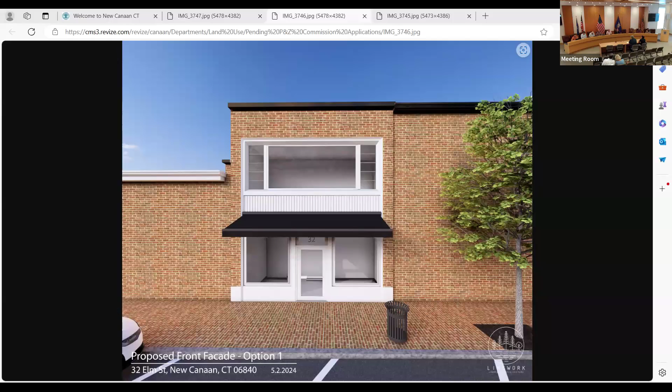Okay, now you're good. We're here tonight to propose a very simple modification to the existing first floor level storefront at 32 Elm Street. And that modification involves reinstalling existing elements of the storefront by moving, on the Elm Street side, the door will come forward 20 inches and the glass would then align with the facade above. And as you can see on the jamb next to the brick, that's as far as we would come forward. That's our, if you can imagine the glass just doing this. So we're bringing the whole thing forward.

Same thing in the back. We have a pocket with splayed glass going back. We just want to bring that door forward, the door, the frame, the jamb for the window forward, and align it with the existing glass. And that will align with the facade above. The walls will remain the same height as they are now, which is 21 inches, both front and back. The clear opening on the front is 41 inches, and we would maintain the ADA sill.

Once that's built, we would propose to cover the old metal parts with a material called AZEK. It would be white and look like wood.

We then had a glass contractor come down and talk to us on site to take a look at our ideas. He said it's very simple for him to do, he does it all the time. So that was encouraging.

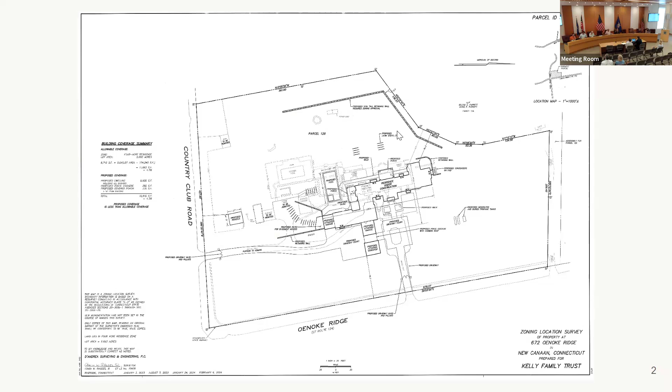You'll see that there's a stone wall opening here, a retaining wall for the walkout. And then in the rear, this is the longer wall that sits along about 12 feet to 39 feet from the westerly property line. This is just a picture from the front.

This is a house that's under construction right now. It's about a 5.6 acre piece of property, once again on the corner. This is the front of the property that faces Oenoke. This is the corner of the property.

Essentially, as you look down Country Club Road, you can see it starts to drop off even from the top here. This is the second entrance that comes off Country Club Road into the property itself. And this is looking back up the street from Country Club Road towards Oenoke.

You can see here the grade change as it comes down, and that's important because that's really essentially why we're here today, to put in these retaining walls to try and do two things. Number one, we're trying to create a recreational backyard for the Kellys, because right now it sort of just falls down off the back of the property. The second thing we're trying to do is alleviate the drainage that's coming down the hill from this property to other properties on Country Club Road.

This is that back drop off that I wanted to show you as part of the initial part of it. You can see it's a pretty steep drop. It's about 17 feet from the back of the property to where we're actually proposing to put the retaining wall to the west. This is just kind of a larger view of it.

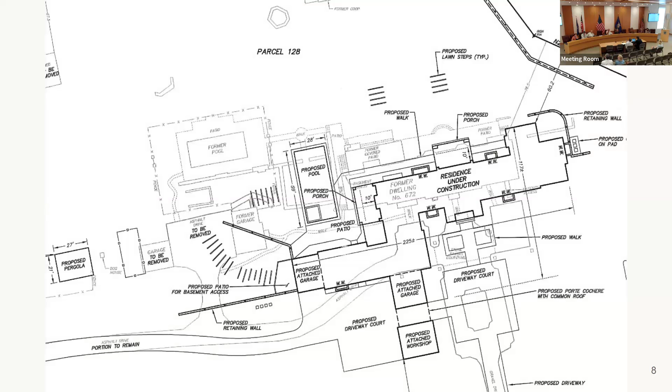This is our plan, which we'll go through in a little bit more detail. You'll see the first item we're asking for is this walkout area, which is where the garage comes in, the basement walkout comes in. And then the rear wall here, which is what we're proposing to bring back up and create this recreational space in the back of the property.

I'm going to come back to the site plan when Len's ready, so I'm just going to skip through these. So here's that walkout area that we were talking about earlier. The walls are going to be in on this area and they are above 4 feet.

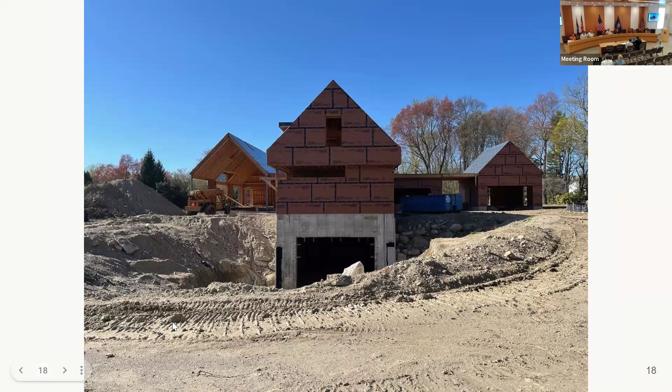This is looking back up towards Oenoke Ridge from that particular spot of where the walkout's going to be. And this is just a larger dimension of how the walkout's going to work and the way it's been regraded on the sides and the way the walls are going to come.

The retaining walls are going to hold back this dirt. The west retaining wall, and like I said, I'll go back through with the site plan and with the development team so that they can explain exactly how they came up with this.

But I just thought it would be a good idea to get us all familiarized with the site before we get to that.

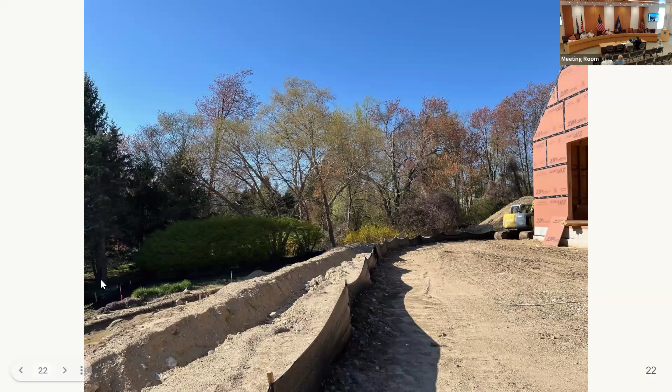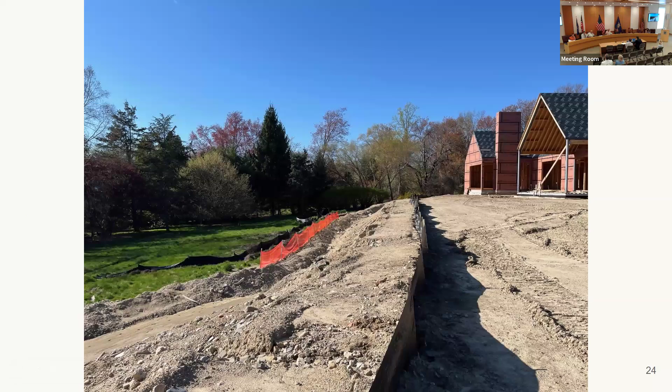So here's the west retaining wall. This is the back of the property right now, looking north. Here's the screening to the north side of the property, and you can see the drop off. I've got a couple different pictures of the drop off. Fortunately, we have a lot of screening right now on the property, which is not coming down. This is once again looking northwest, and this is once again the rear, looking down. You've seen this picture once before.

And then we're back to this plan here, which I'm going to skip through. And this is the wall itself, which I'm going to ask Alan Broadbent to go through as far as the wall that we're proposing to build on this.

I think what I'll do now is just have Alan go through this. Here's some pictures of the screening that exists on the property from the landscape perspective, and this is looking back towards Country Club Road.

So the wall is going to start in this particular area back here. You'll see that we have some nice screening on both the south side of the property, looking south. I think I'll let Alan take it from this slide, because this is the development of the property and how he went about thinking about creating this space in the back and bringing in the retaining wall itself. So Alan, I'll turn it over to you.

Thank you, Dave, appreciate that. Alan Broadbent, landscape architect with Broadbent Design Studio. Wonderful to be here tonight.

As Dave mentioned, our office was engaged by the client, Chris and Laura, to come up with a way to compose this site to fit a new residence onto it, and to maximize the site's potential and make it a beautiful and wonderful place for them to raise a family.

As we began our process, we looked at the existing conditions on the site, and we noted immediately that there's a beautiful stand of maple and oak trees in the southeast corner, where Country Club and Oenoke meet, and that area would remain as a glade area with lawn beneath it.

It's easy to quickly jump to the default wall system, which is a concrete reinforced retaining wall. Whether or not it's stuccoed or clad with stone, this type of wall is a known entity and is used in many different places. It does, however, require an extreme amount of excavation, hundreds of yards of concrete, and thousands of pounds of steel.

So we started looking at this thinking, is this really the right solution to build this kind of wall, knowing that already 80% of the proposed wall would be obscured by existing screening trees, and that we could achieve 100% screening if we added a few more trees and shrubs? So what other wall systems are out there that would be more efficient, more value conscious, and have a lighter hand on the earth?

We looked at retaining wall systems built of segmented concrete block, systems that use geogrid mat reinforcing to hold back the earth and that have greater drainage benefits to the project. So we arrived at the wall proposed to you today, which is a Unilock segmented concrete retaining wall that allows this wall to be built without the volume and mass that a concrete retaining wall requires, and with the drainage benefits this wall delivers.

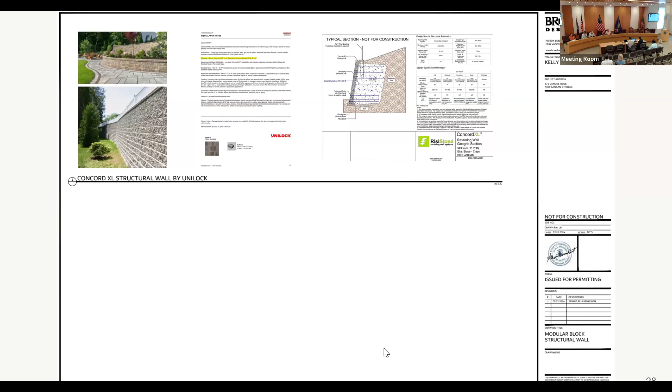Good evening. My name is Leonard D'Andrea, Connecticut professional engineer. Our firm, D'Andrea Surveying & Engineering, P.C., provided land surveying and site engineering services. To my left is Adam Serini - he was the brains of the design, he did all the analysis, and we came up with the design presented in this slide.

If you could back up to slide 9, I'd like to start with the existing conditions. There were a couple of letters submitted from Attorney Green about an original design back in 2008 implemented to help solve drainage problems for the downgradient neighbors. We recognized that and documented it, surveying it into our existing conditions plan, so we're fully aware of what that initial plan was. Now you can proceed to the site design plan.

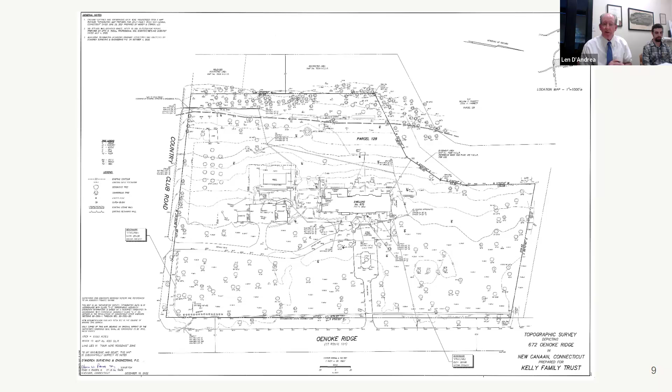This plan shows the latest design, which includes the retaining walls and the walkout basement. But behind this is our drainage system, designed to accommodate the larger footprint of the home and to better keep with the design requirements of the town of New Canaan. In that southwest corner, when we walked it, we recognized there was some sort of capturing system, which turned out to be a curtain drain.

That's the thin line where the cursor is pointing. We also noticed it had not been well maintained, so we knew we had to address that in our design going forward. The new design includes a significantly sized infiltration array, more or less in the middle of the site - that large rectangle - which does two things.

It provides first flush control and infiltration for water quality, so it's a retention system. In addition, it's a detention system, and whatever exceeds that capacity gets released in a controlled fashion so that we have decreases in the peak rate of discharge.

We also added a rain garden in the southwest corner, something that wasn't there before, to get more volume control and more water quality. And of course, we're rebuilding the curtain drain. One more thing of interest here is it is a bigger footprint, and it also has a deeper foundation.

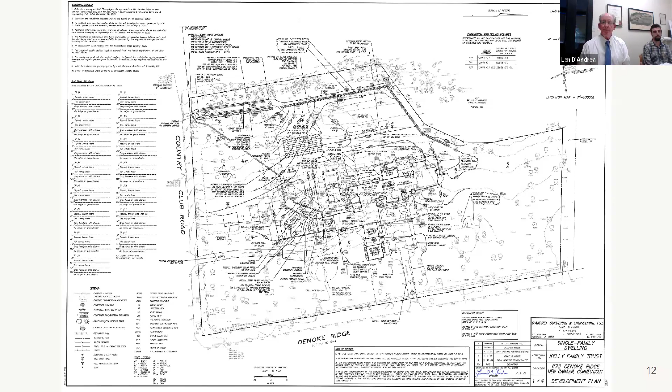Would you like to ask any questions now, or do you want me to finish? Why don't you go ahead and finish, and then we'll ask all the questions. Okay.

So as far as the special permit criteria that we look at, we believe that with this lot, it's a larger lot in the zone. Obviously it's a 4-acre zone. We have over 5.6 acres on the property. So this particular development, these particular retaining walls are not going to be anything different than what could be on these properties today.

We believe that they're appropriate for what we're trying to accomplish, and they also really serve as an additional slowing down of this water, and is going to really help not only this particular piece of property but everybody down on Country Club Road from that.

The first plans, a couple of plans that we had that Alan talked about a little bit, we have a lot of screening on this property to begin with, but they've added almost another 25 trees and shrubs to the property. I mean, the whole design of this wall was that we wanted no one to see it.

So to a certain extent, it wasn't how the wall was going to look, it was how no one was going to be able to see the wall. That's what the proposal was, that's what the landscape design team wanted to do. We don't want anyone to see the wall either, from any of our neighbors' properties, and we think that we've achieved that to this point with this new plan.

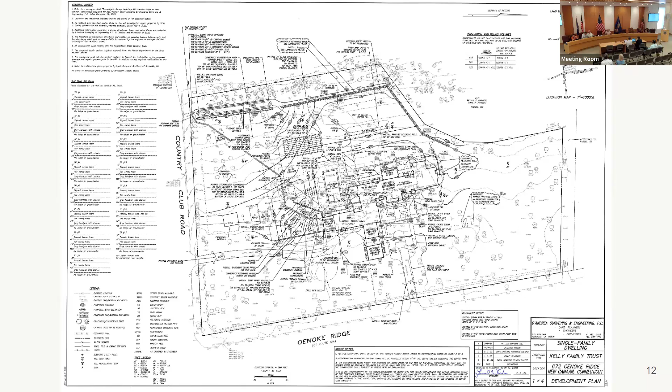Well, I'll address it regardless. Attorney Green was concerned and his neighbor was concerned. Now they're a property away, so they're not technically within 100 feet of this application. So they don't have standing in the application, but orient us, because the survey only identifies Perrette. He's below Perrette, further west. How far does Perrette go? Is there somebody else adjacent to Perrette? And who does Attorney Green represent? The Russells. And are they adjacent?

No. So if you look on this plan here, this is slide 37. You'll see the Perrette house is what I'm pointing to here, and this is the Russell's house down here. And who is to the north? That's Ovenoak. We have not heard from them.

But nonetheless, the design is to help everybody on the street. So we don't have an issue with Attorney Green and the Russells coming to inquire about this to make sure that everything is being done properly. It's not something we're concerned about, because in the end, what we're trying to do is alleviate this water situation. So we have responded to that.

We have not heard back from McCord yet. But as I said, we're very pleased with the plan. We think it's been really well thought out. It's got a tremendous amount of existing screening. We're adding a bunch more screening, which will continue to hide this wall. And we think that in the end, this is a great asset to the neighborhood, not only for drainage, but this wall being screened will create an area for the applicants to enjoy instead of having a steep drop off on the back of their property.

So I'm happy to answer any more questions today. I don't know if you want to hear from anyone else first, or if you want to ask any questions of the engineer. I think we do have some questions. Mr. Benton, Commissioner Benton here.

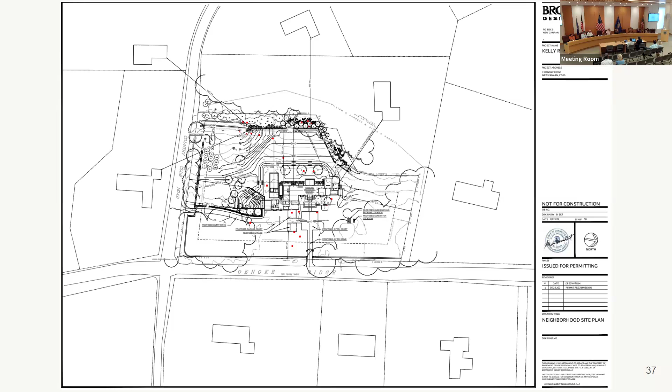I'd like to, if I may, comment on the block wall construction, would that be appropriate?

The modular block wall, one good characteristic about it, is it doesn't require a deep foundation. It's very shallow, and the way it stabilizes as you come up, you have fabric that goes back and you fill on top of it, and that resists the overturning. So as you build it up, you create a barrier, and it goes up daily.

So as far as ease of construction and the least amount of disturbance, this is a very good wall selection, not to mention the fact that it's 8 to 9, 10 feet high. It's just built essentially from the ground up, and as you continue up, you have a wall that continues to block any runoff. It's not nearly as disruptive as a big concrete wall, which takes much longer. You dig it first, pour your footing, come back, put your forms up, put your steel, all these things. It's a much longer duration of exposure. So that's why we like it in this application.

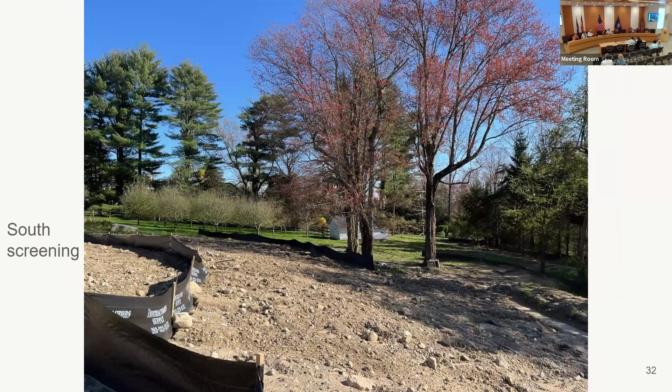I wanted to address the question about the 4-foot wall plus an 8-foot horizontal separation plus a 4-foot wall. One of the challenges of this property, not immediately obvious, and it wasn't to us because we actually started with the 4-foot wall, separation, 4-foot wall design, is that the property has a cut out of it.

It isn't a wholly square shape. There's a big sliver out of the side of it. The reason that exists is that when this was subdivided—it was many acres—it was split into 2 properties in order to make the property that is now Mr. Perret's property a buildable lot. A minimum diameter 350-foot circle had to be placed on that lot, and you can overlay a 350-foot diameter circle, and it's the exact shape of the property line. That's literally how the surveyor did it.

So that big cut out of the property means that on the northern property line, we have a much tighter space to work with. If our goal is to maximize usable land, which is what we're trying to accomplish in that area, it becomes really tough when you rob another 8 feet. It sounds silly, like 8 feet, really? It's 5.5 acres. Consider the position of the house, which we already moved 12 feet closer to Oenoke Ridge than the old house to get away from that angled property line as much as we could, and consider that 3 acres of the property won't be touched. The entire southern side, southeastern side, and northeastern side are remaining exactly as is.

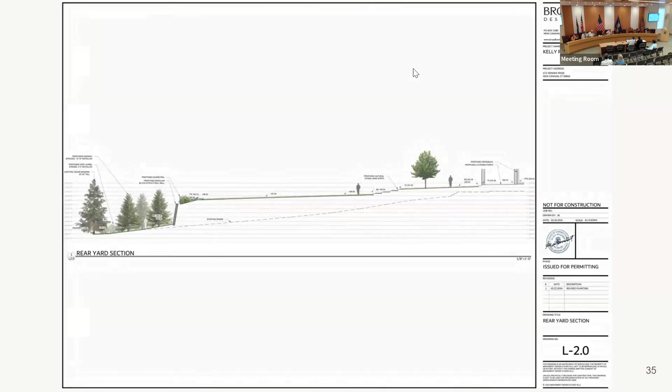That's a very interesting section of land. There is, on the Parrett property, an easement in favor of the owners of 672 Oenoke that was written up long before our clients took ownership, allowing them to mow and maintain that space. So in effect, we're still 40 feet from the edge of the eased space, but we're 12 feet from the actual property line.

What's great is that in our meetings with Mr. Parrett, he had a suggestion we took and thought was fantastic. Our prior application showed a single row of Norway spruces only on the Kelly property. It was his suggestion that rather than do that, we stagger them over the property line into the mow-and-maintain easement space, broadening the evergreen spacing for even greater density. So now it shows staggering, half on his property, half on the Kelly property, allowing for even greater density.

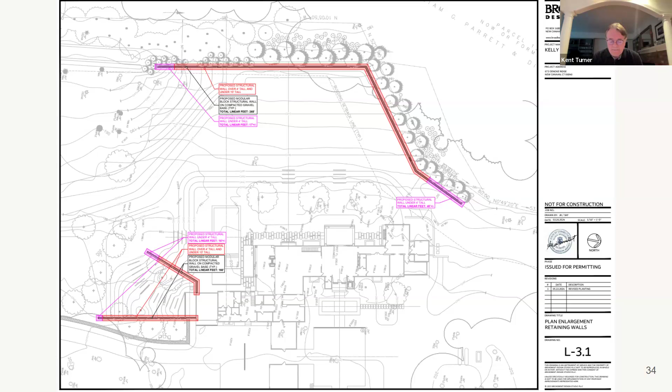May I suggest that when you come back to us next time, you develop some kind of logistics plan that shows the routing of the trucks, the staging areas, and give us a better idea of how many trucks are going to be required to move 7,800 cubic yards of earth. Certainly, we can do that. Thank you.

And when you say modular block, I think the View, and I think the neighbors are thinking the View, and I need to be reassured that this isn't going to look like the View. Well, and to your point, yeah, it's going to be hidden. What we're doing is going to be hidden. It's not going to be like the Oak house, which I pass every day and watch that wall fall down every day too.

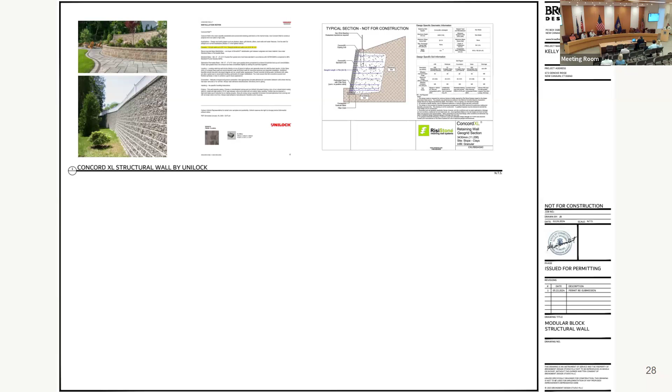I think I can avoid the white thing if you guys can hear me.

Hi, Amy Zavatakis, Rucci Law Group. I represent Diane and William Perrette. Hopefully you received the letter that I sent this morning. I had a few things I was going to say, but before I jump into that, I want to first address the representations that have been made about the communications that have been had with the Perrettes already and what they have and haven't provided.

The Perrettes appreciate that the neighbors reached out to them early on in the process, and yes, they have been in communication with them. Unfortunately, the most recent revisions to the plan we didn't receive until yesterday. So to the extent the applicant is discussing the current plans, we haven't really had time to evaluate those. The Perrettes will be evaluating that. There's going to be continued conversations, and their engineer will take a look at the plans, and if there are further comments, those will be delivered to the applicant. But there wasn't any intention to not provide them with any feedback.

It has been an ongoing conversation, and as was raised by the landscape architect, he mentioned that he had asked to come onto the Perrette's property to view it from their side, to take some photos. Some dates were given. That hasn't happened yet, but there certainly hasn't been any intention otherwise. So I just wanted to clear the record on that.

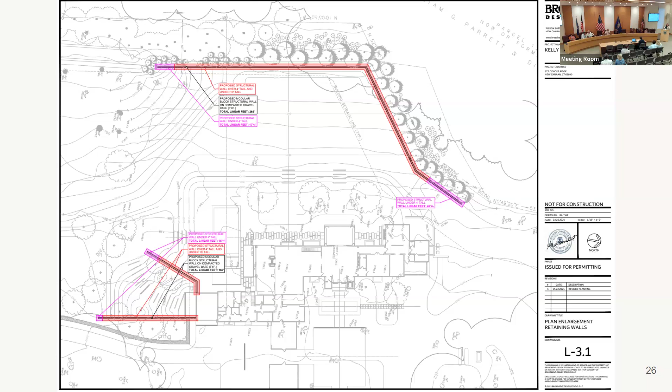And I think that plan that shows the elevation of the wall — you can see not only does the property line currently slope down towards the Perrette property, but it continues to slope down. So we have to realize that the Perrette property is much lower. And again, this goes back to the wall. The wall from his property, even forgetting the fence on top, is really almost 14 feet because the grade change continues to go down.

I think that was most of what I wanted to say. I think there was some discussion that well, we could put a house up here. This is, again, we are within the setbacks, and we need to be very careful as to not impact negatively the value and the aesthetics on the Parrett property, just to provide this applicant with a nice flat yard, because that's really, at the end of the day, the whole purpose of this wall, is to provide them with a flat yard. They've got a building permit. They're constructing a house that complies with all of New Canaan's regulations, just doesn't have a yard that they want. So let's be careful about how we balance out these two desires. Thank you.

Anyone else? Okay, we'll take Mr. Parrett and then I'll go to you.

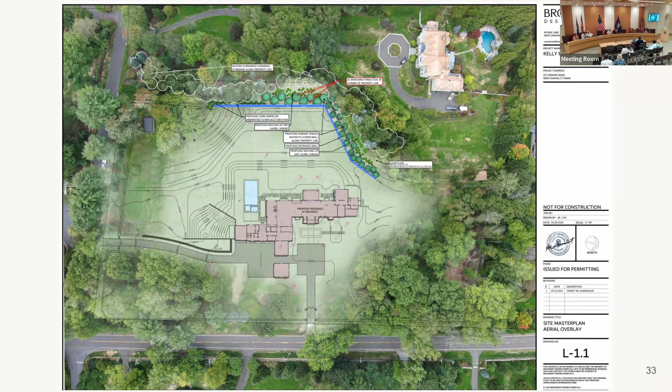As I'm sure you all remember, we heard this application last in October. At that time, we denied without prejudice the request for outdoor music and reverted back to their 2019 special permit approval, which allowed for 2 outdoor events a year and 4 tables. We told them to work on some things and come back to us, and here they are.

Tonight, I'll reiterate this after we hear the application, but I think the things the commission needs to consider is: is this an appropriate location for us to allow outdoor dining to bleed into outdoor entertainment? If so, what type of outdoor entertainment events do we wish to allow, and are they amplified or non-amplified? How many and which type are allowed each season? I guess we're looking at a season as probably May through October. And then what controls are needed to regulate the events?